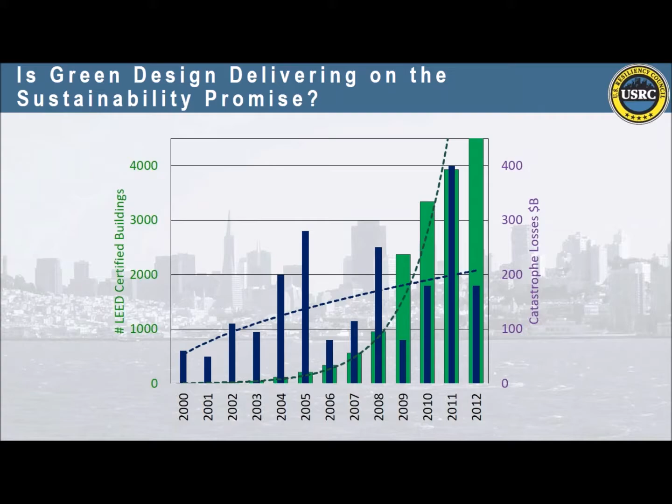Even though we've seen such a sharp increase in the amount of LEED certified buildings that have popped up around the country, we also are seeing a continued increase in the amount of damage that's being caused. So how sustainable really is that movement? That's what we want to try and get at today, and that's what the USRC is trying to promote.

I think the best example of this is probably Superstorm Sandy. It hit the New York, New Jersey area, and there were more LEED certified buildings there than anywhere else in the world. The catchphrase I use is that these buildings were designed to have a low impact on the environment, but not for the environment to have a low impact on them. That's really the difference between pure green design and true sustainability, true resilience.

You can see the cost of that event in terms of deaths and buildings damaged. Even just the amount of debris generated—over 10 million cubic yards—had to be moved, stored off-site, and will degrade somehow. Generally it's going to be replaced with new building construction. So this is what we want to avoid.

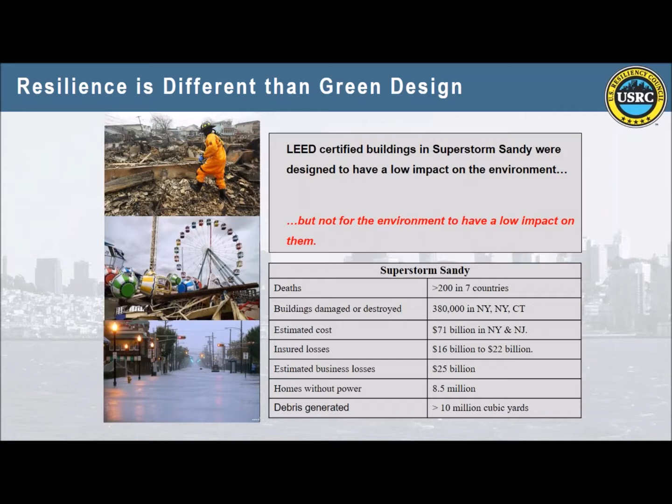We obviously want buildings that have low impacts on the environment, but we also want them to withstand the environment's impacts on them.

So where I see us going here is a convergence between architects and engineers. We really want the concept of the U.S. Resiliency Council to be something that's embraced by the whole AE profession.

Both architects and engineers used to design right based off of the code, following the prescriptive measures required. Then architects, 20 years ago, started developing green designs using LEED, USGBC, and other processes. Engineers, around the same time, were doing performance-based design—learning how to measure the performance of individual buildings after an earthquake or other disaster.

But I think we can combine that and move forward one more step to focus on resilience-based design—combining green architecture and structurally resilient systems, and looking at how that resilient design impacts the whole community.

We talk a lot about hospitals. A lot of us have worked on hospitals and we know why they have to be resilient. But what about a grocery store? What about a grocery store in downtown San Francisco where, without transportation networks, it would be very difficult for somebody to go out and find food after an earthquake?

How resilient should your grocery store be, or your housing for that matter, when you have people in the San Francisco Bay Area who are going to be displaced throughout the Bay Area? It's not going to be easy to find housing. So resilience-based design helps look at the wider aspects of the community as well as individual buildings.

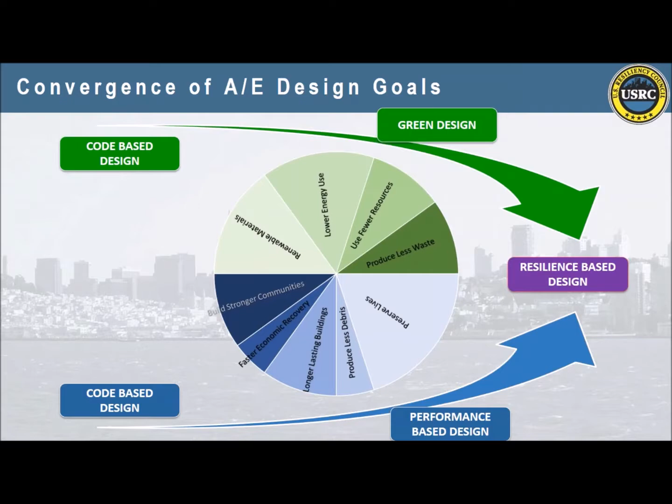You can see from this wheel how traditional green design and performance-based resilient design should work hand in hand. The goal of the U.S. Resiliency Council is to promote this across both disciplines of architecture and engineering.

That brings me to the U.S. Resiliency Council itself. We were founded in 2011 as an outgrowth of work the Structural Engineers Association of Northern California was doing to develop a way to measure and communicate building performance through a rating system to owners, buyers, lenders, and those that might lease buildings. We're established as a nonprofit, and our goal is twofold: to promote the concepts of resilience, educating everyone involved in a building—whether an owner, tenant, or a parent taking their kids to school—and also to implement a rating system.

We have rating systems for everything in the world—colleges, cars, green design with LEED. We would like to see a rating system for performance of buildings in natural disasters. So we've started with earthquakes, and we'll be moving on to hurricanes, floods, wildfires, and other disasters. We're proud to have 64 members that support us financially and have contributed technically to the development of the rating system, and 100+ other supporters that have endorsed us or are working with us in other ways.

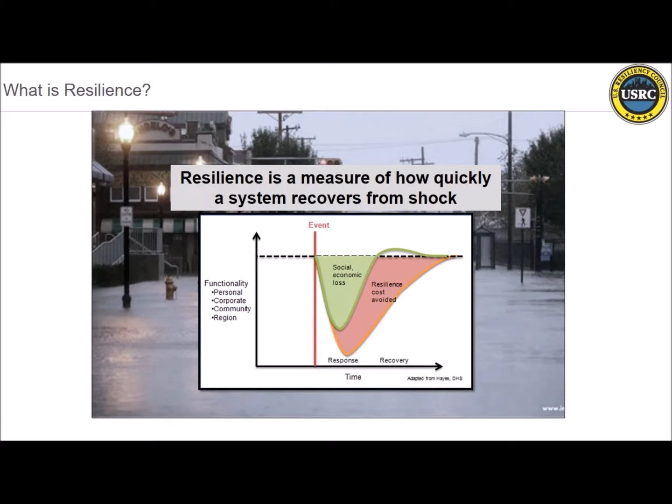Resilience is a measure of how quickly a system recovers from a shock. So I'm going to talk about that earthquake shock and what we do. We all know the embedded energy and the embedded cost, why we want to do this. We also know that we want to incorporate all the broad definitions of resilience into the design process.

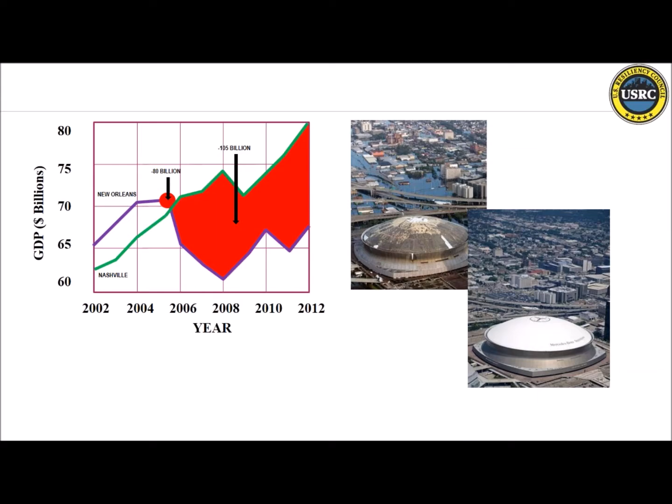Evan mentioned Sandy. We're all familiar with Hurricane Katrina and what happened to the city of New Orleans. It was not a very resilient response - not just because of what happened to buildings like the Superdome, but when you have a population that moves completely and totally out of a city, it's really hard to economically recover. Those are the things being discussed by chief resilience officers all over the globe about how we can make a more resilient community.

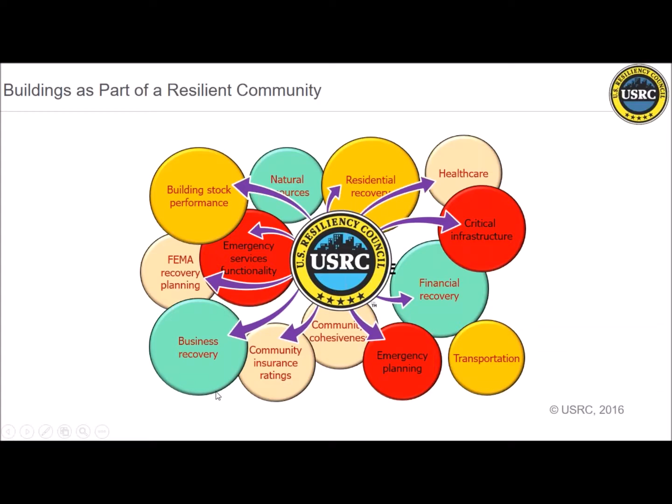I think that's probably the message I want to convey the most - it's not just seismic resilience I'm after, it's community resilience. I think that's what we're all trying to achieve. We have to consider all of these things. I had the opportunity to meet the chief resilience officer in New Orleans. He has 24 components to resilience, and one of them is actually not earthquakes - thank goodness they have one thing they don't have to worry about.

I want to talk a little bit about risk. I don't know how many architects have seen this USGS posting on the probability and the risk. Anyone seen this before? Few people. So what it says is there's a 72% chance of a magnitude 6.7 earthquake or greater that will happen by 2043. This figure, when I first started showing this slide 10 years ago, it was 58%.

The probability keeps going up. Now, that earthquake may not happen in my lifetime, but it's going to happen in the lifetime of the buildings that we're designing and building today. And that's why it's so important.

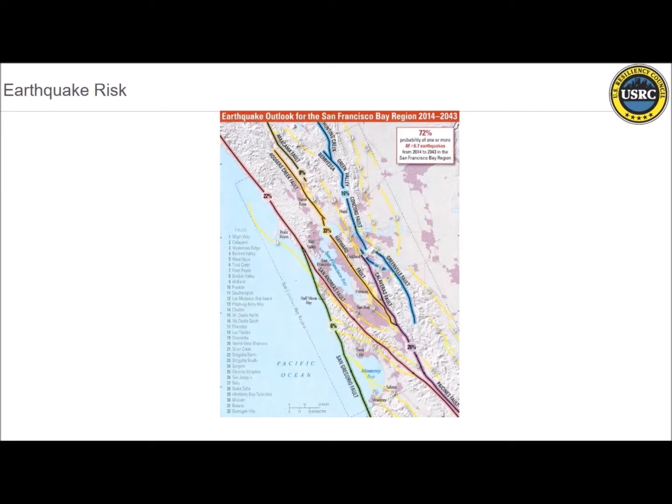We have had 2 reminder earthquakes, at least in my career - the 1989 Loma Prieta, and the more recent 2014 Napa earthquake. These were pretty small events. '89 was not a small event for Santa Cruz, but it was really a small event for San Francisco.

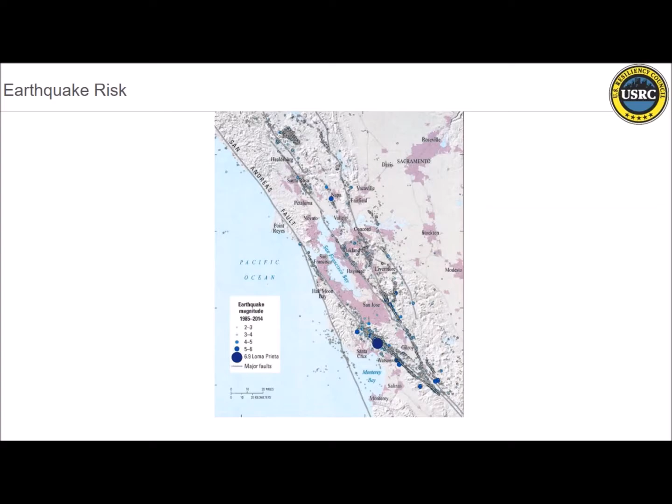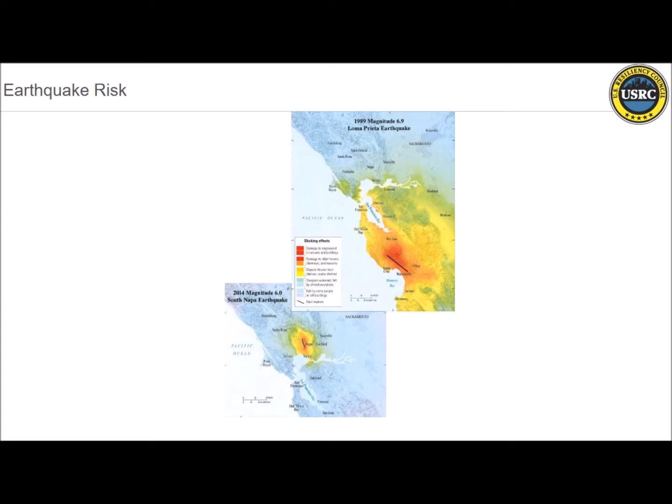I don't know if you can read these. These are strong shaking maps - maybe can we reduce the lights a little bit, because I want you to see these, to make a point about these shake intensity maps. The upper right one is for Loma Prieta, and you see the black line, which is the fault rupture, and the red zone is the strong ground shaking. Look at San Francisco, look at the East Bay - very little ground shaking really in those areas. Napa was very isolated - the map is to the same scale, but you can see it was pretty significant for Napa, but not for the region around it.

Here is the ground shaking risk for the Bay Area. Look at the red zone there.

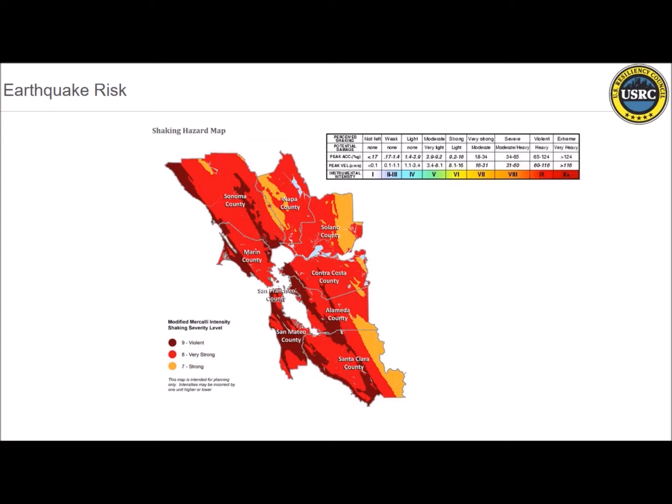This is what we're afraid of. This is what we're going to get. I can't promise you it. We don't exactly know where it's going to be. This would be the strong ground shaking from a repeat of the 1906 earthquake on the San Andreas Fault.

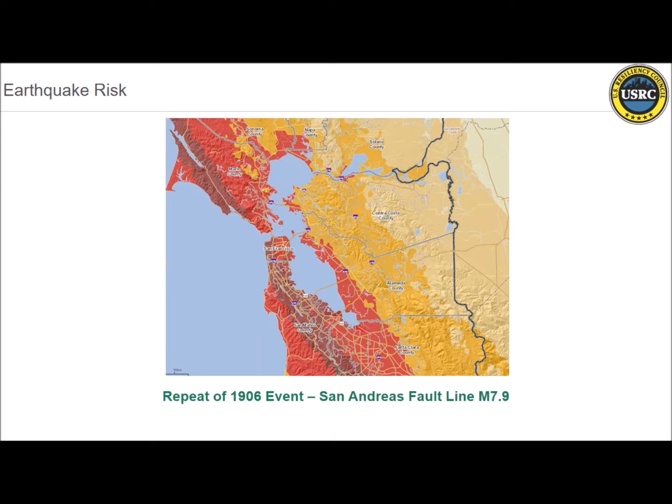Look at the extent of that ground shaking. We're not talking about a Santa Cruz event, we're not talking about a Napa event. We're talking about a regional event, and that's the important thing we need to consider.

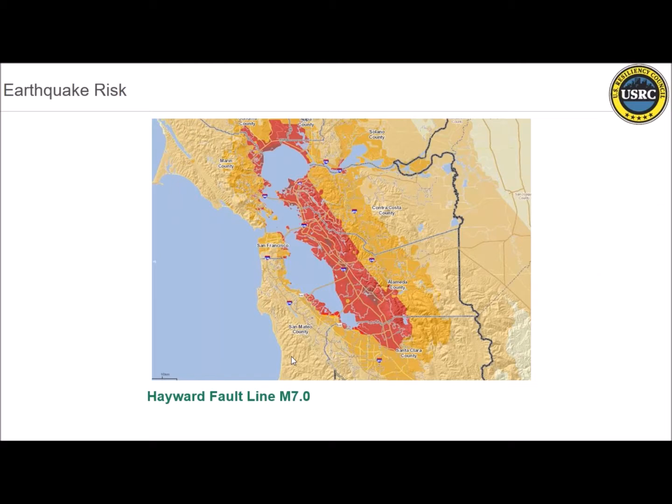This is the scenario for a Hayward fault. This is actually the scenario that we all think, or the seismologists think, is the likely earthquake we are going to have. And just one slide in red are the liquefaction zones in the Bay Area.

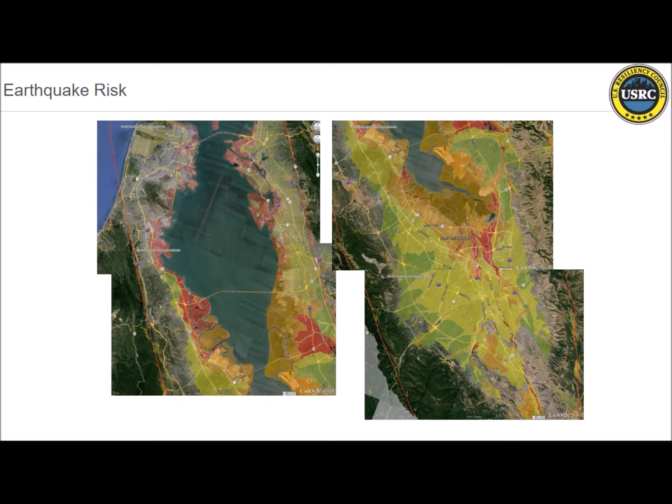It's almost synonymous with the zones in the Bay that are most vulnerable to sea level rise. And I will say, some of those zones are also some of our most disenfranchised neighborhoods and communities in the Bay Area. And I guarantee you those are going to be the ones hit the hardest by the earthquake.

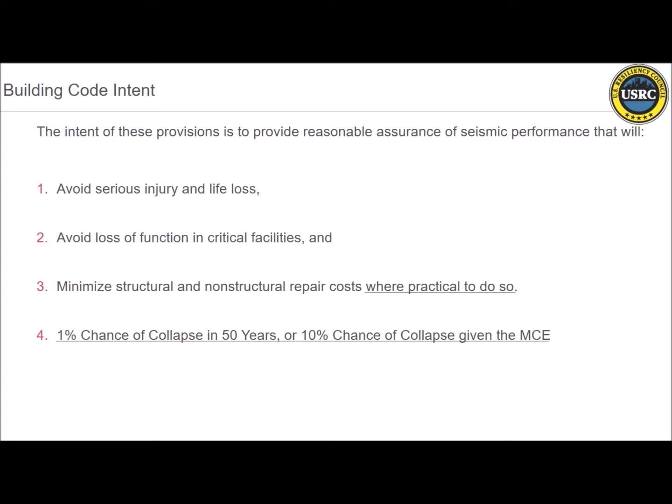The building code, I'm sure even architects know, is a minimum code for earthquakes. It's a life safety code, that's all it is. What does it mean? It means that it's designed so it doesn't collapse, protects life safety, and there's safe egress out of the building. It says nothing about what condition the building is in. It could be a complete economical loss, but that's a code-designed building.

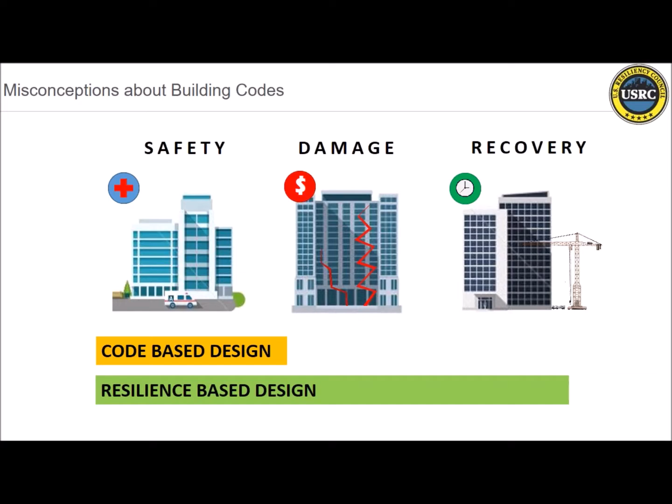This slide just depicts what we engineers think of as safety, a code-based design, but why resilience-based design really needs to capture damage and recovery.

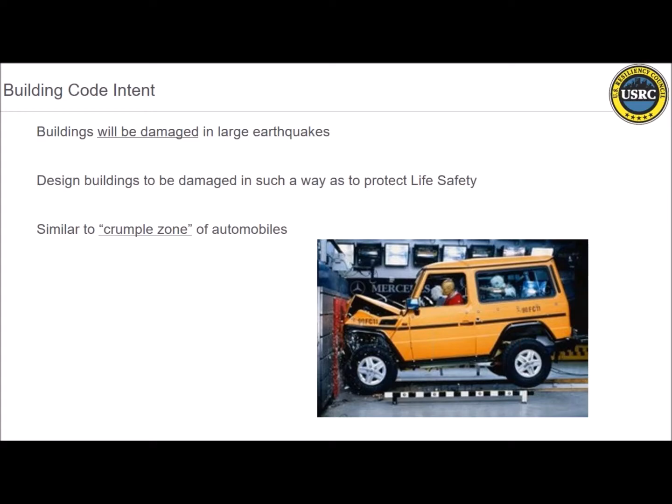We have an analogy of a crumple zone in a car. Cars in a collision are meant to absorb the energy and crumple in response to that energy. That's somewhat what we structural engineers do for buildings. But again, it's an acceptance of damage. I don't know how many people really realize that a code design accepts damage, accepts a lot of damage.

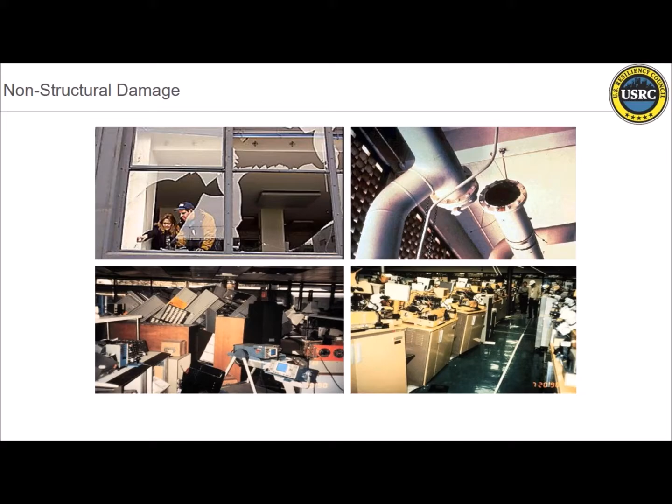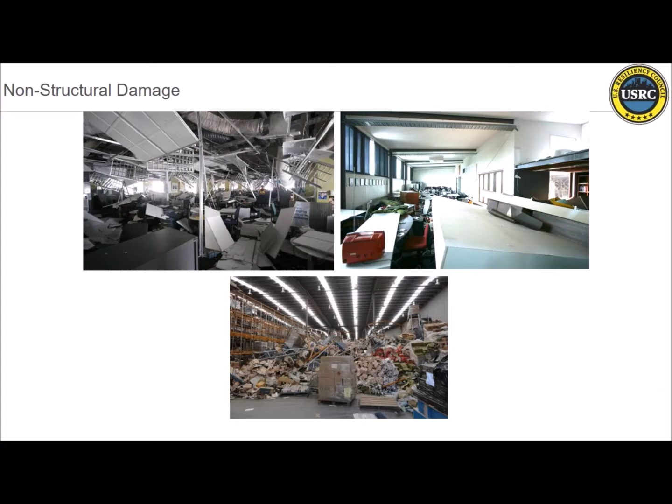We also need to look at and understand non-structural damage, and this is what Michael referred to and what Evan referred to as well. Even if the structure survives and does what it's supposed to do, we can get a lot of damage inside to the contents of the building, and that can pretty much destroy the functionality of the building. It takes a long time to repair that, to clean it up, and to get it back in shape. Some of these photos are from New Zealand, where aside from how the building structure responded, look at the content damage and how functional are those buildings, how resilient are those buildings?

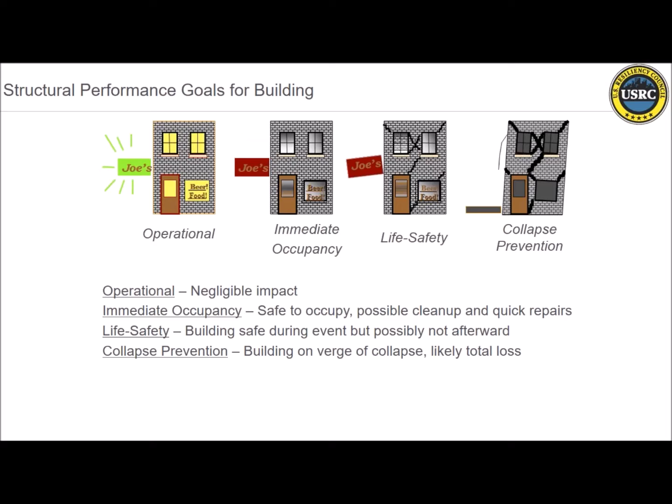Not very. We talk about structural performance in terms of 4 levels, well really mainly 3 levels: operational, negligible impact; immediate occupancy, safe to occupy, possible cleanup and quick repairs; and then the code level, life safety, collapse prevention. I'm not sure where we invented collapse prevention, and I'm not sure it's so acceptable to really design buildings to collapse prevention. I know how it crept into our vocabulary in performance design, but I'm not sure that's really acceptable to any of us.

We do have new tools that we can respond to and really put some real strong metrics around performance of the building. We can really look at how we can reduce the amount of repair time, how we can reduce the amount of damage, and how we can restore buildings more quickly to be operational.

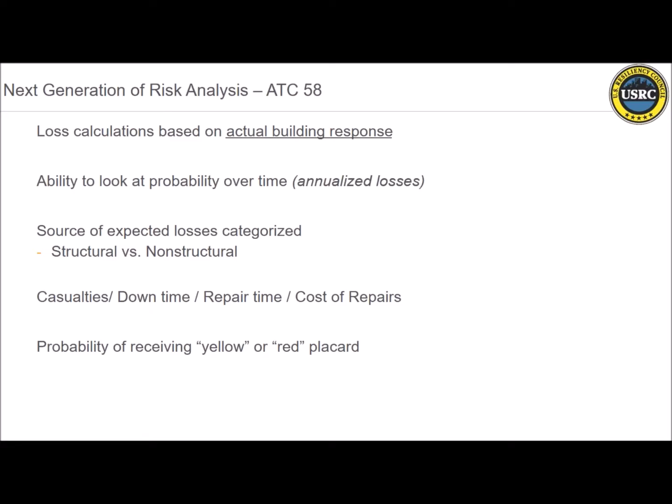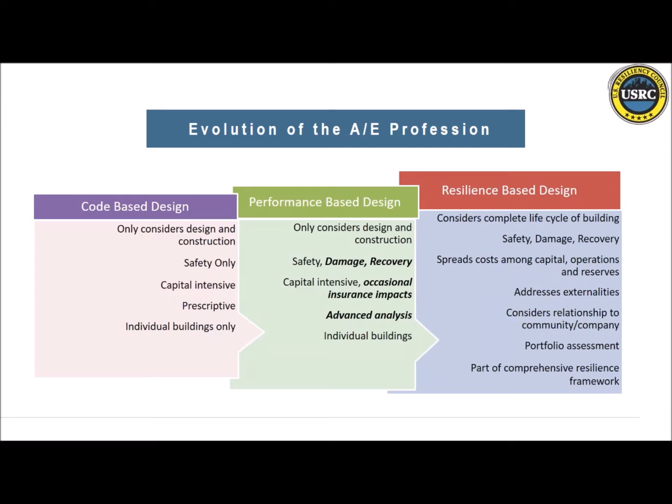Again, this evolution of the A&E professions: we started with a code-based design, sustainability also led to performance-based design, and now we really do have these tools to do resilience-based design, and it is a holistic process. Michael described it, and the case study will show in more specifics how it starts from the beginning and how the cost premium can really be minimized within the process.

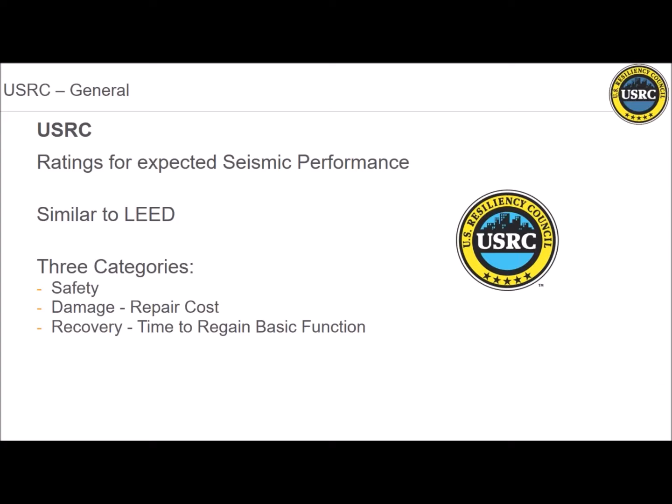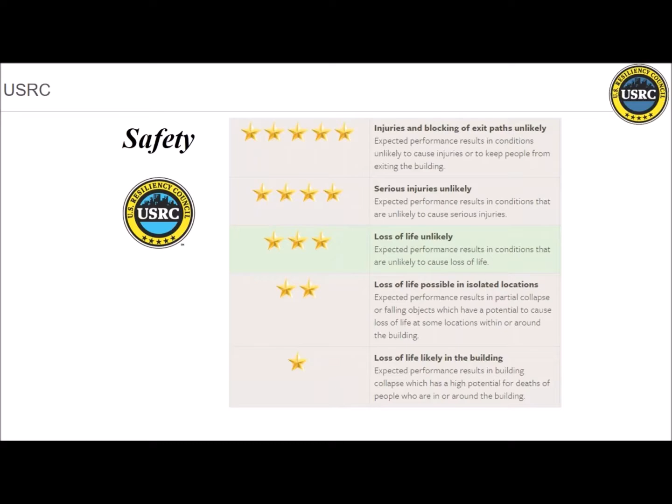The USRC rating was meant to look at safety, damage, and recovery, all three of those. Some of us call it death, damage, and downtime because it's easier to remember. We look at 3 dimensions, and within each of those dimensions we have a 5-star system that can really break down and target what kind of performance you would get. Repair cost the same way, downtime the same way, and there's considerable rigor that goes into this process. A code-based design would probably be a good code-based design: 3 stars, 3 stars, and 2 stars.

There is nothing wrong with a good code-based design. But what we need to start doing as designers together is to figure out and target what performance we want the building to have, and then design to that. For community resilience, we're going to have buildings designed to all different criteria. But for it to be a resilient community, it needs to improve its combination of buildings that have more substantial responsiveness and resilience to an earthquake.

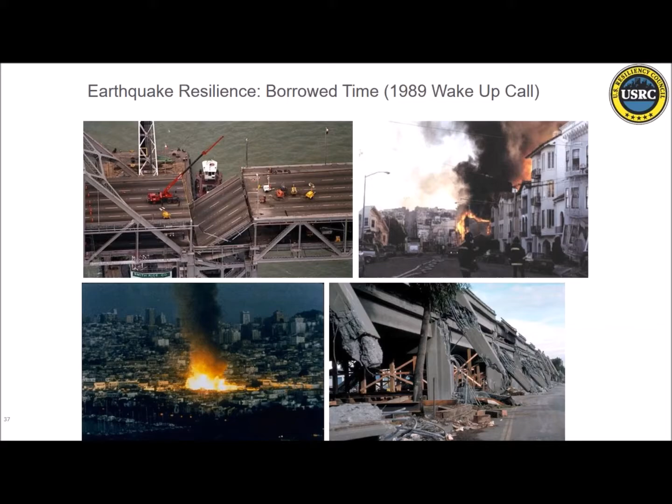Back to the 1989 earthquake. It was a good wake-up call for a while. I'm not sure today how much of a wake-up call it is. I don't know how many times in my career I have met a building owner that has said, 'my building made it through the big one.' What's the big one? 1989. No, it wasn't. There was a time where it was a good reminder, but it's no longer a particularly good reminder. It was a good reminder for the city of San Francisco that embarked on how to make the response more resilient.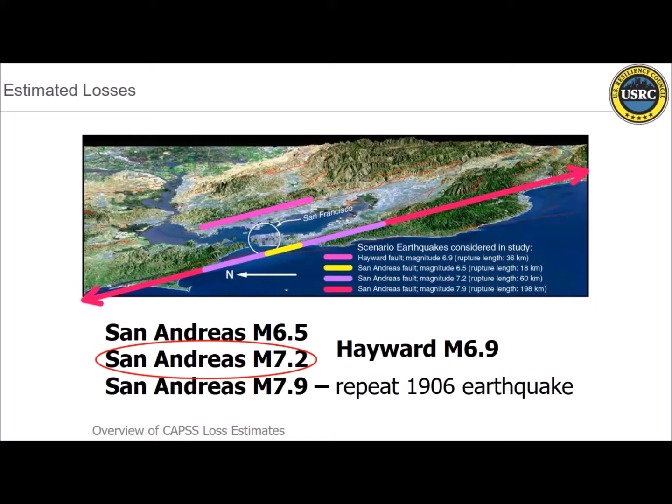It was called CAPSS, the Community Action Plan for Seismic Safety. And they did extensive study. They looked at various scenarios, categorized what the losses would be, what the deaths, what the damage, what the homeless population would be, and then embarked on a program.

I don't really expect you to read this, but it's a plan that started in 2010 and goes through 2040, and it's how to take on and reduce the risk to the city and county of San Francisco. Unfortunately, we're not very far along.

We have recently, within the last couple of years, have a soft story abatement program. We have a new program around protecting K through 12 private schools so that they're built to the same standards, or retrofitted to the same standards, that public schools have been built to since 1933. The point of this slide is we're barely at the beginning of the work that needs to be done.

And again, I'm a little impatient about how far we haven't gone yet. But the city of San Francisco has a plan, and gradually and slowly, we're getting there. I think we're more resilient than we were 5 years ago, but we're not necessarily as resilient as we would like to be.

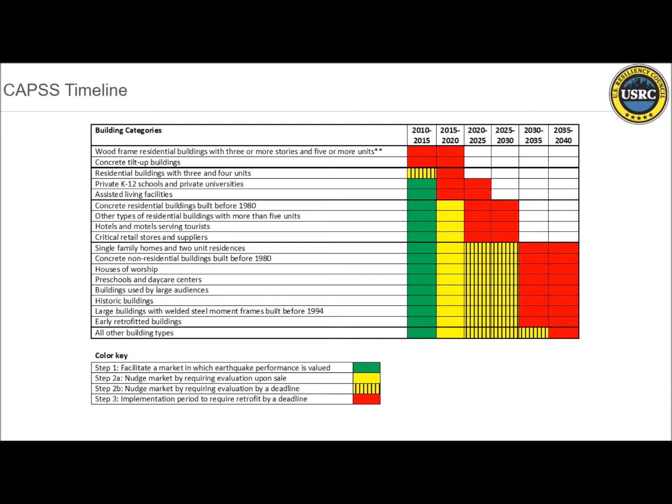But going back, and this is my last slide, going back to the region and the social justice play of why resilient design is so important. I have spent a career chasing earthquakes around the world, and earthquakes are uncanny in their ability of finding weaknesses in buildings and hammering them.

They're also uncanny in their ability to hit the most disenfranchised countries, or communities that really cannot afford to rebuild. We see it in China, we saw it in New Zealand, we see it everywhere. The same thing is going to happen in the Bay Area. It's going to happen in San Francisco again.

It's better. They're doing things. UC Berkeley is doing good things. UCSF is doing terrific things. Stanford campus is doing very good things around resilience.

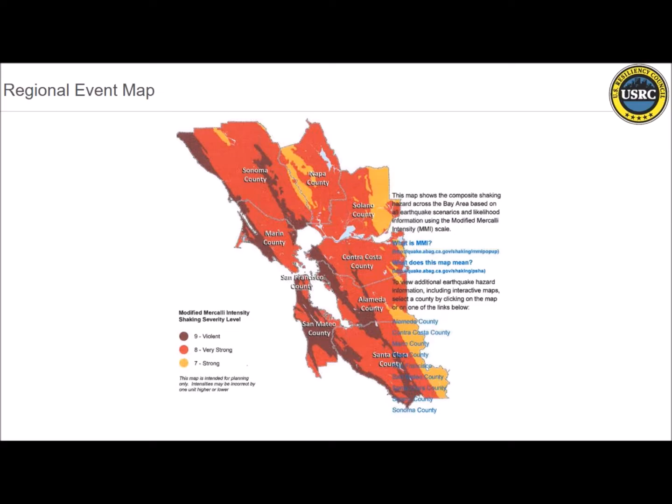So Michael already gave a very good introduction to what's happening at Mission Bay. This Block 33 building—actually the person who was going to speak about this could not attend tonight, so I'm a fairly quick study, and I'm not totally involved in the project, but I think I can speak to where the project really started, which was a conversation about defining the resilience goals for the project.

And it was to look at lower repair costs, reduce operational downtime, and consider structural and non-structural system performance. If I'm saying anything incorrect, let me know. No, you're saying it great.

So let me just, David's going to talk about the structure, and Brett, who is here from Smith Group JJR, is the technical architect on the project, and he's going to talk about the shell. I thought that it would be a good introduction to following a path of thinking through a building design. And I think we'll have a little bit of information about the cost premium, the minimal cost premium that this engenders.

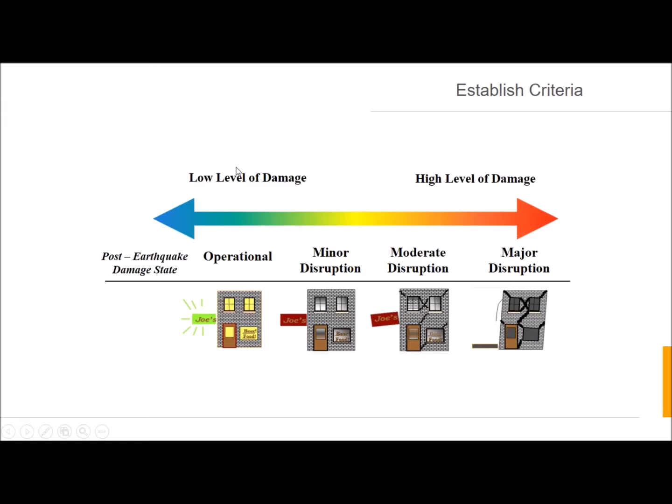So step one was, and this was a project that at the RFP stage, as I understand it, even laid out what the performance goals for the project were. Is that correct? That's correct, yes. This is kind of just another slide showing somewhere in this continuum, the desire was to be to the left-hand side of the performance spectrum. But we didn't know at the outset how far our money would take us. And so it's been a bit of an adventurous journey, but we're happy with where we're at.

3 tiers were defined for consideration. Tier 1 was a code minimum design. Tier 2 was a reduced damage at the code level earthquake, and Tier 3 was a reduced damage at the maximum considered earthquake level.

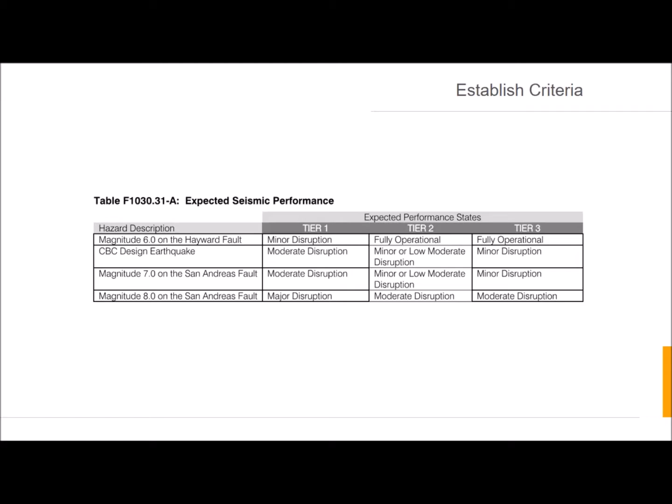And there were, tier is used in another sense here, but there were really 3 structural enhancements. Again, the red line was the code performance, and then there was kind of 2 other tiers that had various degrees of enhanced structural performance or structural member capacity to try and stiffen the building and reduce the amount of drift, because drift is what causes damage.

So just go back. What's really interesting in the first slide, the right-hand key. Yeah, the right-hand mouse button. And then go to previous.

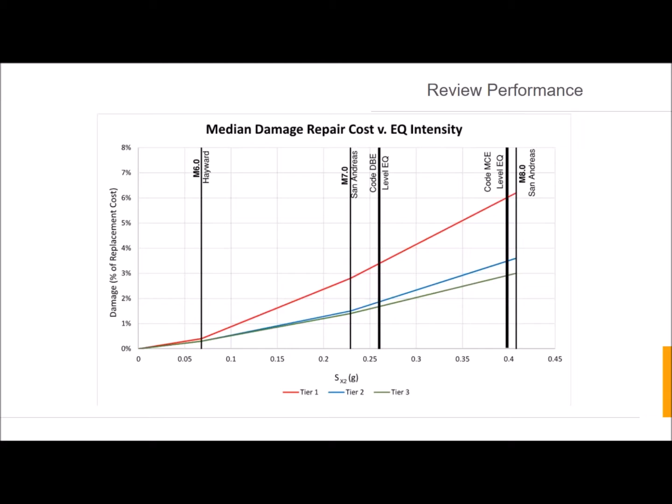Yeah, so look at the M7 on the San Andreas and the code level DBE, Design Basis Earthquake, and look at how close together the blue and green lines are in that zone. And then they don't diverge nearly as much to the M8 on the San Andreas as the two lines diverge from code. And this is in part a feature of the better soil conditions on the site that David should get into. But this really does illustrate for many sites that have reasonably good ground soil conditions, how close the two higher tiers can actually be together, and why it's worth pursuing this.

Which is the next slide, and Michael referred to this earlier in his comments, which was, you know, we can capture the incremental costs, and not only looking at the superstructure cost, but the additional soil improvement that was done that also led to enhanced seismic performance. The tier 2, I believe, was the kind of the selected target, and I think the cost benefit was maybe marginal incremental performance with an additional $600,000-700,000 of cost.

This is just structure, and I know they're looking at non-structural systems, and you're going to talk about the cladding, but there's also mechanical equipment and partitions and other things that also the impact on them is reduced if the building is kept stiffer and the soils are more absorbent to the shock of the earthquake.

And here, I think the noted point was the $900, less than $1 million premium on a project construction cost of $150 million or 165, or a total development cost of over $200 million. There's certainly a good holistic life cycle argument that can be made for, you know, why does an owner want to do this? Doesn't want to repair it later on, doesn't want to go to the embedded energy cost of having to redo this building again.

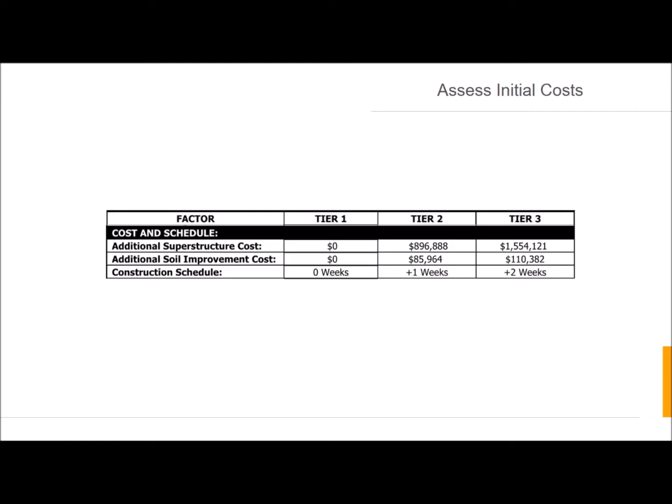The cladding performance was also looked at exhaustively in terms of looking at what the deformations in the structure were going to be and what the cladding system selection would be, and how to keep the envelope, the enclosure, watertight for a design basis earthquake. And that became, you know, again, the important interaction between engineer and architect, just as we know that building configuration, architectural shape, and seismic performance are inextricably linked. And so as we go through not only primary structure, but the envelope systems and all of the other systems in the building, resilience continues to play an important role in the dialogue between designers.

So that was my segue to you, Brett. Perfect. You got it exactly the right slides. That's ideal. Oh, look at this. Thank you.

Okay, how's everyone doing tonight? Still awake? All right, I'll see if I can change that.

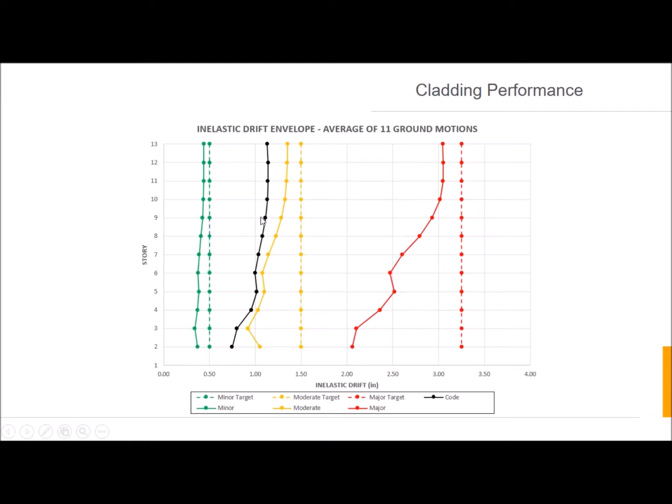So it all starts with design. I think what I wanted to talk about is that when buildings are analyzed, they're sort of roughly rectangular, more or less understandable shapes, but that wasn't enough. We actually wanted to do some different things here.

So these floor plates are rotated upon one another. And that's significant because the systems that are used to clad the building are not maybe the first choice for an ultimately resilient building. I don't mean that as a dig, it's just an economic driver. So instead of a complete unitized system which is designed to rock and actually can perform quite highly, we're looking at different systems.

We're looking at a stud-supported system, which is asking a lot of something like this. But then when you take that and start to rotate the floors, it really asks a lot of questions about how and where we're going to accommodate drift in floors. A lot of times it's done at the underside of slab, but that's difficult when the slabs are jutting out and we've got architectural elements coming together right at that zone. So it actually confused it a little bit.

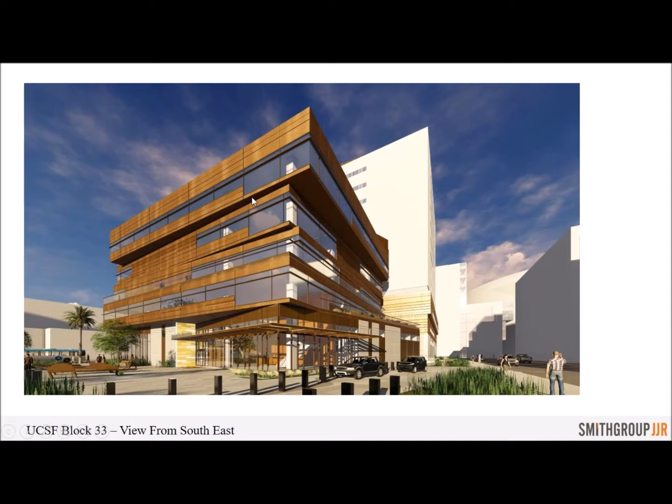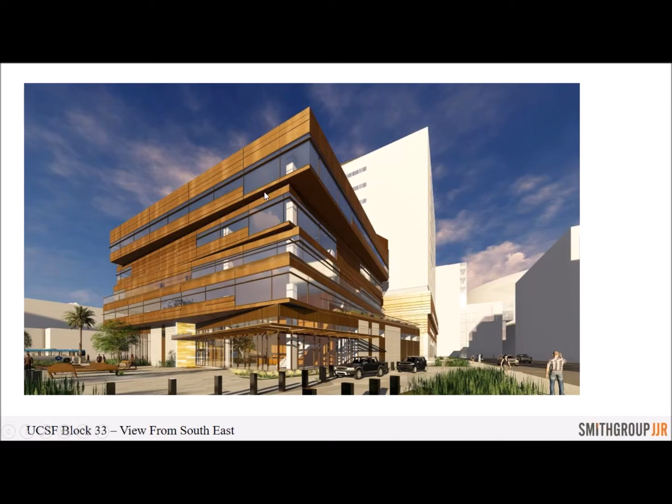So what we ended up doing—I should also state this started, and is continuing, as an integrated project delivery. So we've got other entities, fabricators, contractors, subcontractors that are really helping with this design. And so when we sat down with them originally, for various reasons, they all had different systems to propose to look at this system, to look at the building.

So two major systems: basically a precast system with ribbon windows, and then, as I mentioned, the sort of stud-supported aluminum panels, also with ribbon windows. But what I wanted to talk about here is that this was their first take—and I don't mean to pick sides—but this was various subcontractors coming together using their systems.

This is where they anticipated drift. The blue lines are the horizontal drift, and red lines are vertical to accommodate that horizontal drift. So when we go back to that 1.5-inch displacement, that's the moderate event, the M7 event—most systems, like for sealants, can go in compression to 50%. So we're now talking 3-inch wide joints. There's a lot of gaps in the building.

And even though that might be sealant, as an architect, I don't like big wide gaps in buildings because I think they're unsightly, but I also think it's an opportunity for more weather penetration. So a lot of this discussion is how do we manage that?

So what we kind of tried to do here is rationalize as much as we could about the joint system. Initially, for instance, the proposal was to start with a lot of unitized window systems, which were kind of strange—they're basically rocking systems, but when you put a rocking system within a translating system, you still have things bumping each other on the side.

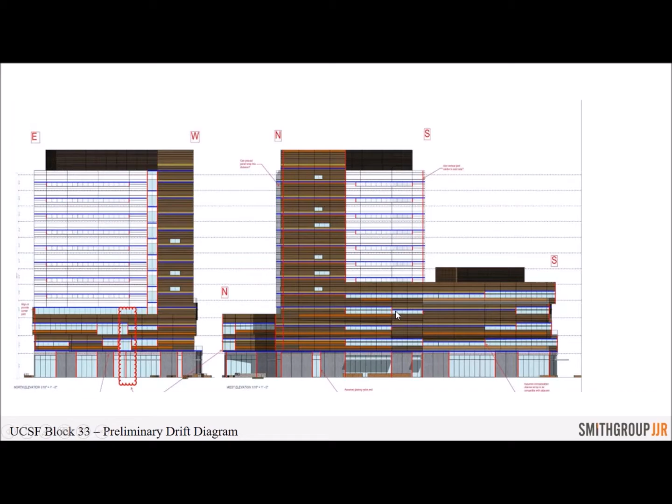We just tried to rationalize it and bring these things straight across. Now we had some immediate challenges with the fenestration. Because the windows are jogging up and down, the idea was that the joints would also have to translate upward around these jiggy-joggy windows. So the immediate question was, how do we want to deal with this? Because these step downs actually create a lot more transitions and joining problems, and performance issues later on.

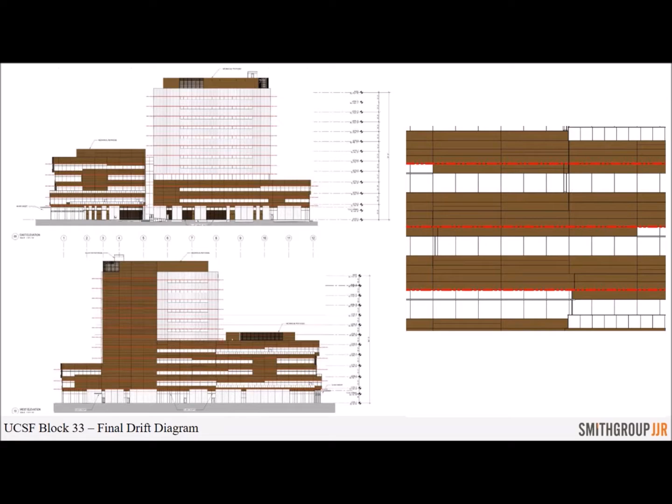So what we tried to do, and this is where we get to the antediluvian part, is we just came up with concept details initially. The idea is we want to get the trade partners to put their systems in here. We don't want to rigidly design everything because we're dealing with different performance criteria for each contractor, so we've got to be mindful of that. It's really about bringing these guys along with a concept.

So the two basic systems I want to show here: precast is pretty straightforward because it's a barrier system. We're looking at a translating joint, and that equates to a pretty large joint. This was considered okay because where these occur are pretty high on the building, so they're not as present at scale at a lower level as they are up above. Needless to say, when you deal with a barrier system, this is kind of what you get if you want to use elastomeric sealants.

The rain screen opportunity gave us a little bit more flexibility because our water line, our continuity line, is really at the face of sheathing, face of glass. So we can treat the cladding as a concealing element as well. Whereas here we're using elastomeric sealants in a wide gap, we can't really do that with sheathing on studs.

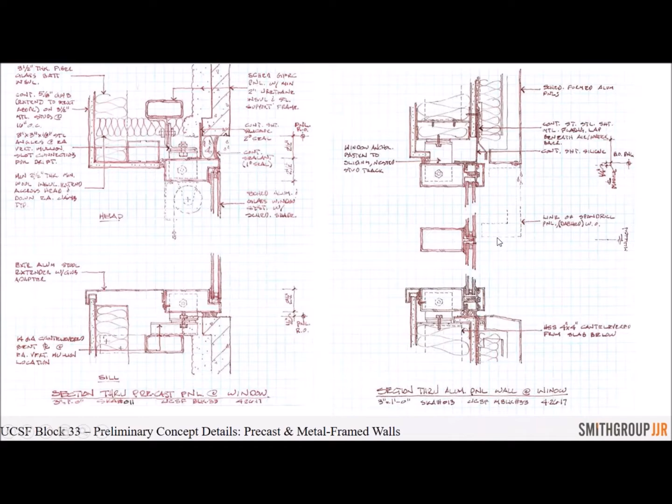But anyway, the other thing we wanted to show here, dashed in where the panels are, is the window head where it steps down. Rather than deal with that, we treated it like what we do with unitized window systems: we kept the windows the same height and just overclad it with the aluminum cladding. This allows us to maintain a consistent joint, so it doesn't have to move up and down, meaning we don't translate vertically at all in the system. It's nothing really revolutionary, but it did help free up the trade contractors to look at this and think about it a different way.

So this is a section through that spandrel condition, and this is the plan condition. We're basically using the window wall to support the cladding elements. It's not really that revolutionary, but I think it shows the kind of holistic thinking that Michael was stating—you really have to look at these systems, understand the design objectives, and see how best we can make these work for us.

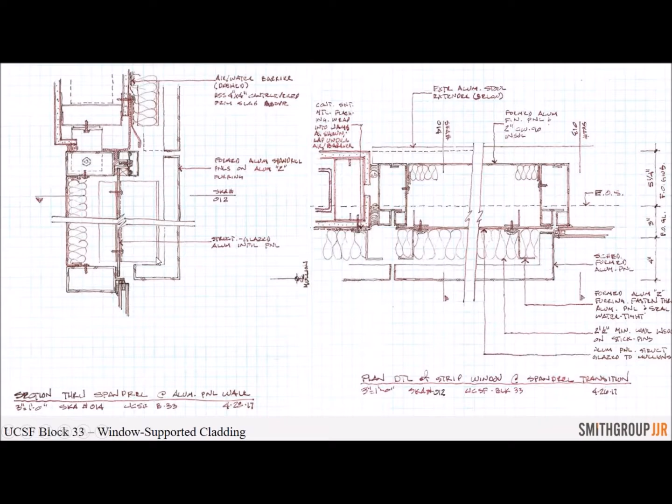So I just wanted to close, and then we'll stop looking at old drawings. Because it's a translating system, at the corners we have to treat it like we would precast. In other words, when the building is moving, this wall in one direction is moving like this, whereas this one is going to tilt. So you get a scissoring action right across this joint, similar to what we do in precast. I think everyone knows once you turn a corner with precast, you're always faced with a larger joint than you'd like, but that's what we have to deal with.

But here again, we're using the silicone transition sheet behind the rain screen. Because this is an open jointed system, we don't necessarily have to expose that as a wide joint, so we can conceal it. So we thought we'd be very clever there.

And then that's going to interface with the horizontal joint at every floor, because these things are going to be at every corner. But again, silicone can lap over silicone quite simply, and it actually maintains its resiliency. This is the condition at the ribbon window where it turns the corner. Here, we do have to accept a larger joint. Again, the STS is really not too pretty to look at unless you like Band-Aids on buildings. So we have to countenance a larger joint there. But still, I think it's a pretty good trade-off for what we're getting.

I should say, the part about working with the manufacturers here is, though we're going to send this through a real performance mock-up, we're extensively sitting down with manufacturers right now and coming up with laboratory tests we're going to do in advance, because the guys that make this, Dow, don't use it for this kind of situation. It's not something they're marketing as a system, but we're going to look at what sort of movement this can take, how much adhesion we need on each side, how wide the silicone transition strip needs to be, whether we create bellows to give a slack zone so it doesn't put the silicone in any stress. These are all questions we need to answer before we get to the mock-up. But that's just an aside. I just didn't want everyone to think you go to the store and buy this stuff. It does require a little bit of work still.

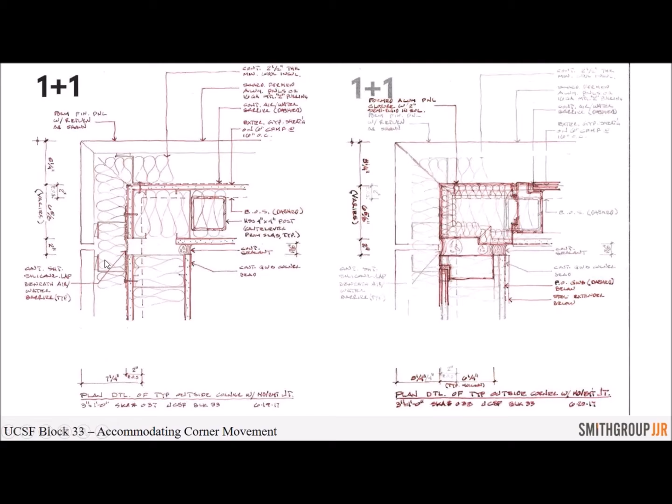Can I ask Brett a question? Absolutely. Just because it sounds like, I mean, this is some pretty creative detailing that you did.

It was more driven by geometry and what you were doing, that had this been a code-level design, the building inter-story drift would have been greater. In fact, is it not somewhat true that by going to a higher performance structural design that made the building stiffer, it at least helped you in terms of keeping some of the joints at a scale that you could deal with the detailing?

Absolutely. Yeah, that's very much the case. You can see that especially in the M6 event. It's only a half inch of drift, which—I do hospitals, and I can't accept a half inch of drift. I'm used to seeing a lot more. Right, so yeah, the stiffness definitely helps.

Great. You are just, one way or the other. Yeah, this way. I'm out of here. Okay, great. All right. Stay close by. You might have a question.

Well, first of all, I really like to thank Michael and David and Brett for the presentation. I think that gives you a really solid flavor of how an owner, an architect, and an engineer start with a criteria, a goal, a mission in mind, a vision for how this building is going to perform, not just every day but after major earthquakes, and how important it is for those three groups to work together, not only from a cost and schedule perspective, but how the structure integrates with the architecture and how they work together to form something that meets those performance goals. So that was really excellent.